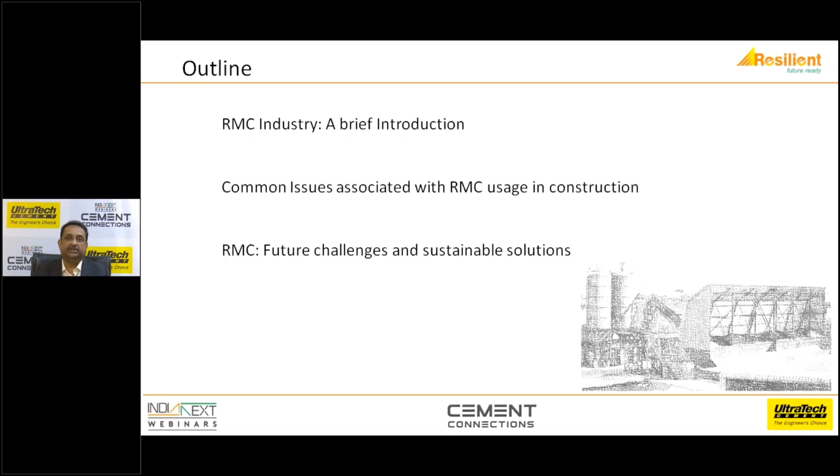The subject today is ready-mix concrete in construction: common issues and solutions. Looking at the outline, I'm going to talk first about a brief introduction to the RMC industry. Then I will get into the main subject today, which is the common issues associated with RMC usage in construction. I will wind up with the future challenges and what we see as sustainable solutions, not just for the ready-mix industry, but for the construction industry at large.

To start with the ready-mix industry, the first commercial ready-mix plant in India started in 1990 in Pune by a Mr. Kelkar. Unfortunately, this enterprise was not a commercial success. It was in 1994 that, for all practical purposes, the ready-mix industry kick-started in Mumbai.

Unitech Prefab and ACC had set up two different units in Mumbai in 1994. Soon after, RMC Group PLC, which at that point in time was the biggest and largest ready-mix producer in the world, entered India and set up their office in Mumbai.

At the same time, Fletcher Challenge from New Zealand, a building materials major, also set up operations in Bangalore. You could understand these were the early days of liberalization, and for multinationals and world majors to see Indian ready-mix concrete as a potential market was a very big, very important step at that point of time.

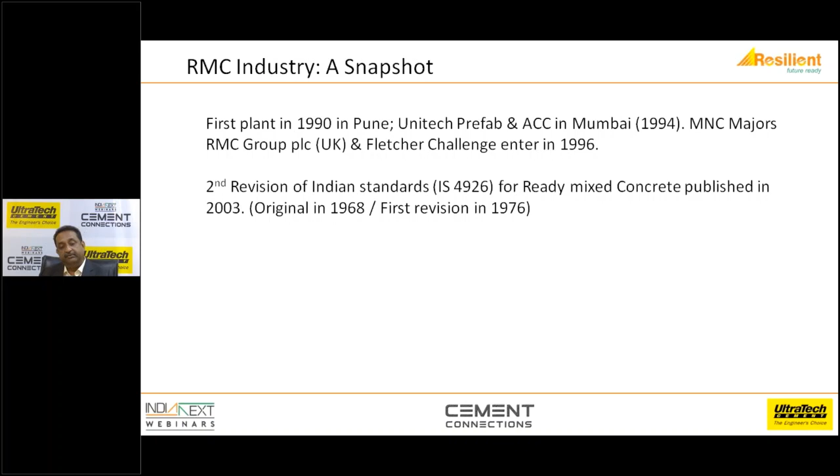Another major milestone was the second revision of the Indian standards for ready-mix concrete in 2003. This was a more comprehensive document covering the ready-mix industry and guidelines for use of ready-mix concrete in India. Many of you may be surprised that this code first came up in 1968, and the first revision came out in 1976, 14 years before even the first plant started in India.

We always believed, and I've been associated with this industry since 1994, heading Unitech Prefab's operations in Mumbai, that the RMC industry will act as a catalyst in modernizing Indian construction. If you look at the construction industry before 1990 or mid-1995, you could hardly find a tower crane at any construction site. But today, the skylines of Mumbai, Bangalore, or Delhi are dotted with a lot of tower cranes.

M45 was the highest, strongest grade of concrete made in those days. But today you have more than 1 million cubic meters of high strength concrete, M60 and even M80 and M95, being used in this country. You have express concrete, colored and textured concrete, self-compacting concrete. So in a way, ready-mix has proved a catalyst to change and modernize the Indian construction industry and has given a lot of support to technological development.

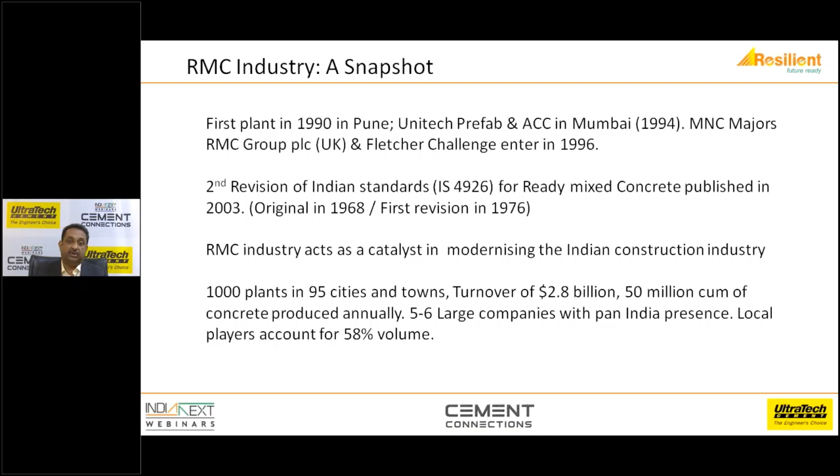By the nature of the business, we also find that large players, 5 to 6 large players with a pan-India presence, operate in this space. But looking at the nature of the product, it's not surprising that this industry is dominated by local players, because you take local raw materials, interact with a local building fraternity, and this product doesn't have a shelf life of more than three hours. So this is a snapshot of the industry and how it has grown.

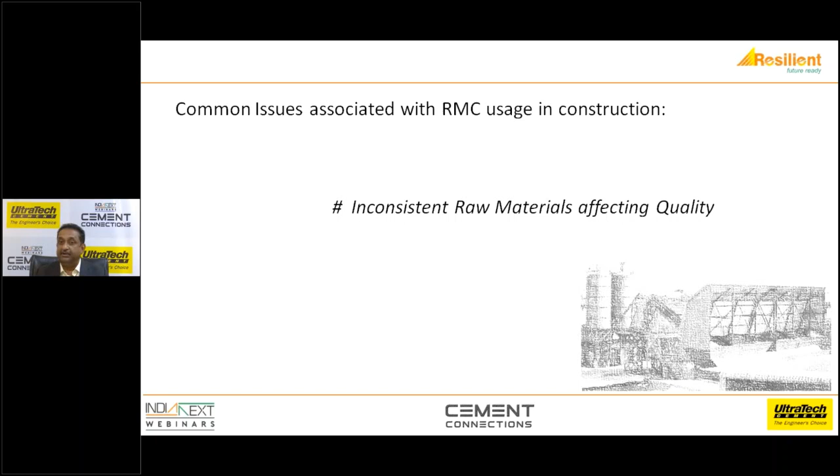I will now go into the major common issues which the customers or users of ready mix often encounter. I've been with this industry for the first 10 years, then moved out, and came back a year back. I found that most of the common issues I faced in those 10 years are the same even now.

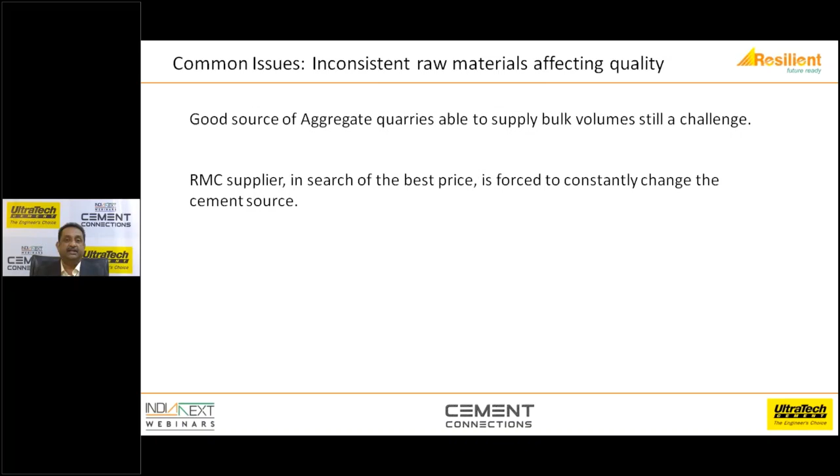Even after the industry has progressed so much, inconsistent raw material has always been an issue. Good quality aggregates with bulk volumes is still a challenge. Although the cement industry has progressed so well and 300 million tons of cement is available in the country today, in search of the best price and commercial deals, the RMC supplier is forced to constantly change the source of cement, which has a major impact on quality.

Fly ash, which is a key supplementary cementitious material, is still a traded commodity with minimal quality standards. While a lot of focus is on cement, aggregates, admixtures and fly ash, what people tend to overlook is potable water quality. Potable water is recommended for making concrete, but the fact of the matter is most of the ready-mix concrete industry

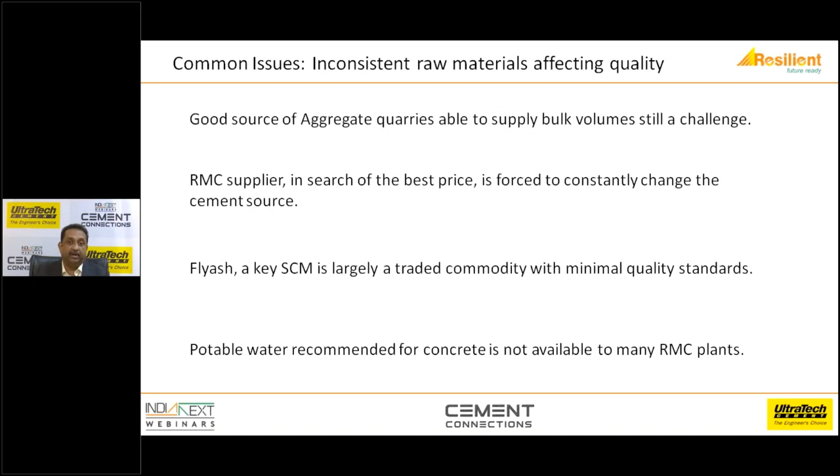don't have access to industrial water supply or municipal water supply, and have to fall back on water suppliers or drilling their own borewell. The quality of the water from the borewell needs to be ascertained, because the chloride limits or the sulfate limits could be beyond the permissible limits in some parts of the country at least. So this is an area where people need to focus.

So how do you deal with these situations? When you look at the source of aggregate, a single source is the ideal situation, but we all know we don't live in an ideal world. So if multiple sources have to be used, make sure that the aggregates are what we call demonstrably similar category. When I say demonstrably similar, we are looking at the key properties of the aggregates, which allow the variability or its impact on the variability of concrete to be even lower.

If you need to have multiple sources, I would advise going for 2 or maximum 3 sources. Ensure it is of the same petrological type, that the dry loose bulk density is within plus minus 75 kg per meter cube tolerance, the apparent particle density is within plus minus 0.04, and the average grading is within plus minus 10% in the mid-band sieves. Also make sure you don't have a high degree of variability in the 75 micron passing in your crushed sand, which is used as fine aggregate.

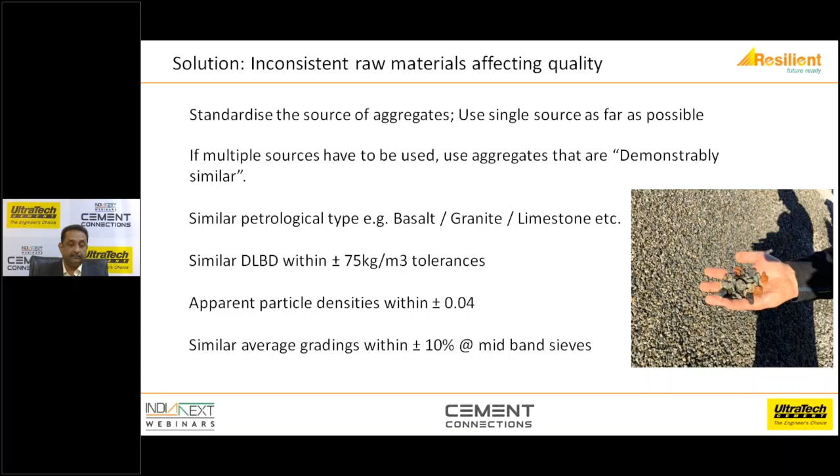If your business demands that you need to go for more than one source of cement, always use only one cement in a silo. Don't mix the cement. And if you need to move in, make sure you shortlist 2 or 3 cements of similar performance - in strength, in workability retention, in setting, and in strength gain - so that even when you have to switch over, you are ready and there are no surprises.

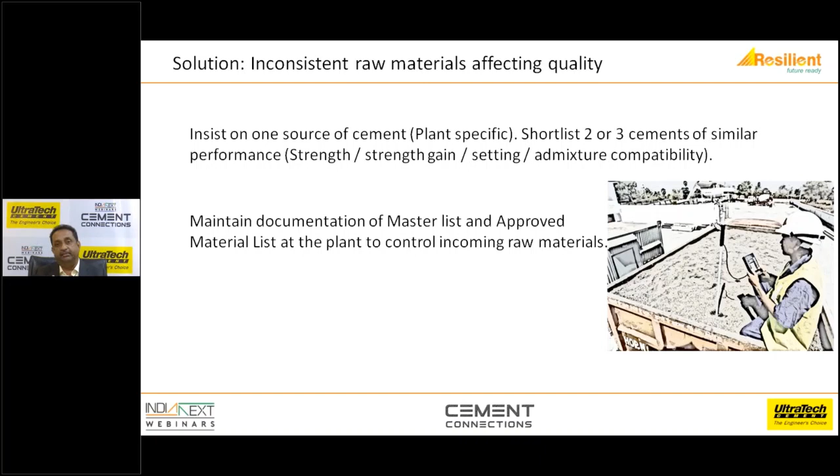From a document control and technical perspective, maintain documentation of the master list. A master list will say that in a particular plant, which are the sources of raw material that have been approved from the technical point of view. There should also be an approved material list at the plant, which is a guideline for the plant officer for inwarding material. At any point of time, the inwarding material should always be part of the approved material list.

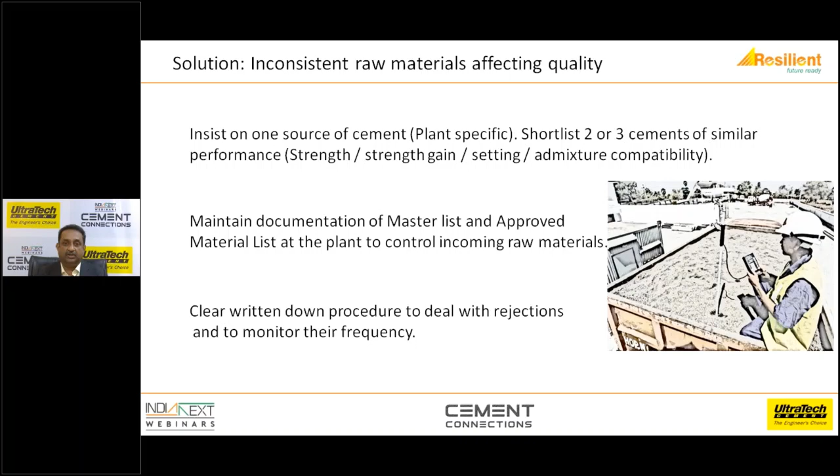When you do the incoming material acceptance, there should be a clear written down procedure to deal with rejections. And monitor the frequency and give feedback to the aggregate supplier so that you can constantly improve the incoming material quality through dialogues, discussions, and communication.

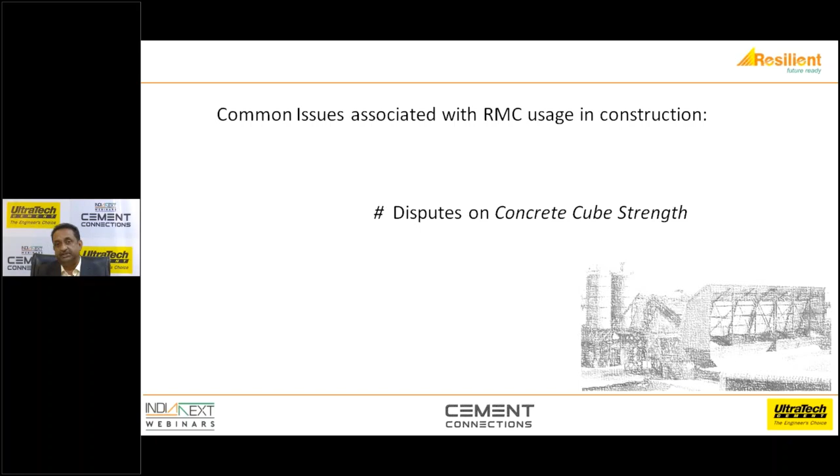The next common issue, which is a big problem, is concrete cube strengths. Quite often, you get disputes between the concrete supplier and the customer, saying there's a big mismatch between the concrete cube results. Before we get into the cube results issue, one of the most important factors to keep in mind is that you are sampling and testing the product right, and the test results reflect the true concrete that has been supplied. The Indian Standards 4926 very clearly tells you the right method of sampling.

You should let go the first 0.3 cubic meters of sample of the concrete which comes out of the truck mixer when you do the sampling, and you should not take the sample from the last 1 cubic meter of the truck mixer. So you have to take 4 increments from anything between the first 0.3 and the last 1 cubic meter of concrete, remix it properly, and then cast the cubes with that.

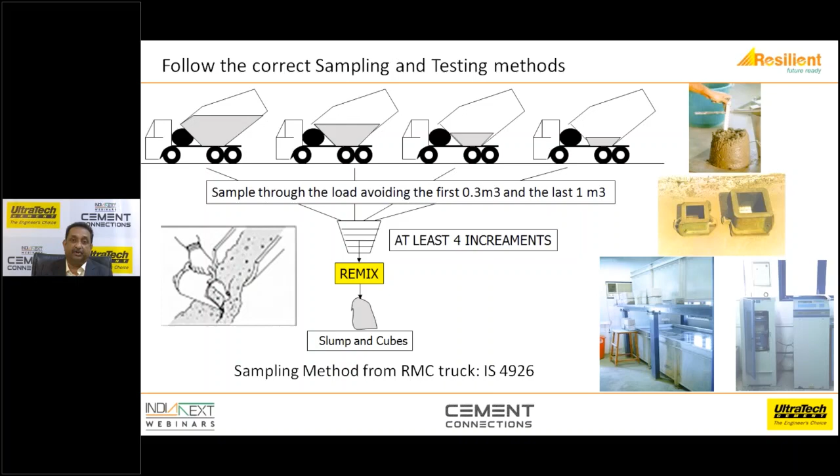It's also important to know the direction in which you do the sampling. What you see on the left in the middle is the right sampling with the scoop, which is perpendicular to the flow of the concrete. Using the right cube molds, using the right curing, using the right testing, the test machines are all important to ensure that you get results which reflect the quality of concrete. Otherwise, this dispute won't be resolved properly - you'll be barking up the wrong tree, because in the first place, the result itself is not proper.

Now, if you don't sample or test right, what are the implications? This is taken from the Manual of Ready-Mix Concrete by JD Dewar and Anderson. A sampling error tells you that you could get a result which is plus or minus 10% of the true average cube results of the batch of concrete. Failure to remix the sample can give you a minus 15% negative result.

There are other issues like your cube mold, lack of mold oil, distorted cube mold. If the cube molds are not perpendicular to each other in the face, you have a problem there. Incomplete compaction of the concrete can also give you issues.

Curing temperature outside the permitted range - your permitted range is 27 plus minus 2 degrees centigrade. If you cure it higher or lower, you will have different kinds of strengths. The lower the temperature, the lower the strength you will get. Higher the temperature, you might end up with increased strength.

One practical issue observed everywhere is a lack of moist curing. Your standard talks about using the concrete - the cubes have to be put in water, cured under moist conditions for 28 days. If you do not cure the concrete in the first 3 or 4 days and it is left outside and then you cure it, it will impact the strength. If you don't continuously keep moist curing, you will have a problem, and that is not reflecting the true quality of the concrete that is supplied.

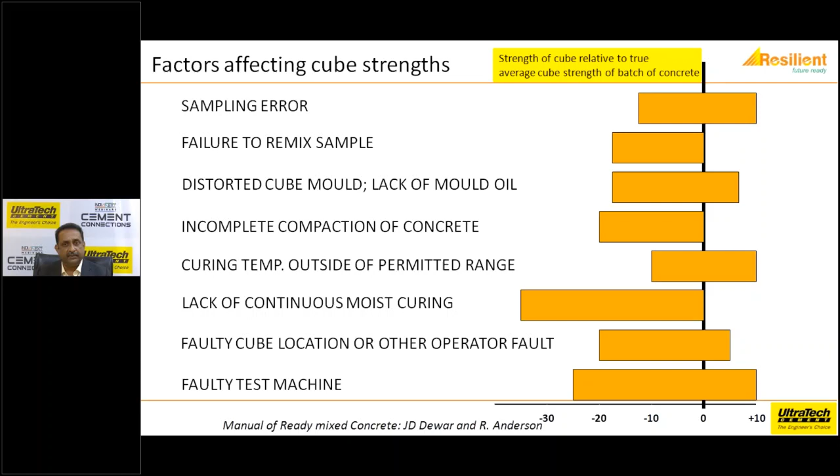Now, having said this, if you still have a problem, how do you actually address that?

Right here, what you see on the screen are some pictures of different non-destructive tests available. On the top right-hand corner, you have the ultrasonic pulse velocity test. On the left bottom, you have the Schmidt hammer or the rebound hammer. You have the concrete pull-out test equipment next to it, and the core test. So these are different non-destructive tests available to the user to find out, if there is a dispute, whether the concrete in question is good or needs further strengthening.

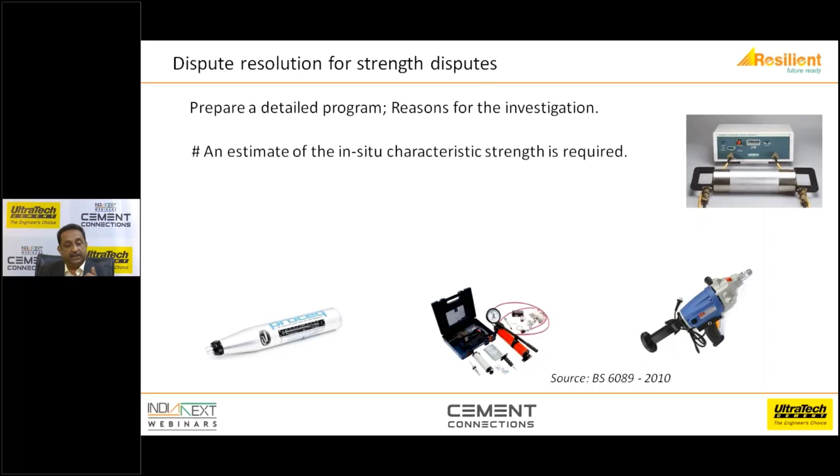But before you go to that, there should be a discussion. A detailed program has got to be chalked out, and the reasons for investigation have got to be clear in the minds of the people concerned. What do you really want to get out of the investigation? Do you need to estimate the in-situ strength of concrete? Or do you feel that the concrete which has been supplied is only problematic in some areas, but the rest of the areas are okay?

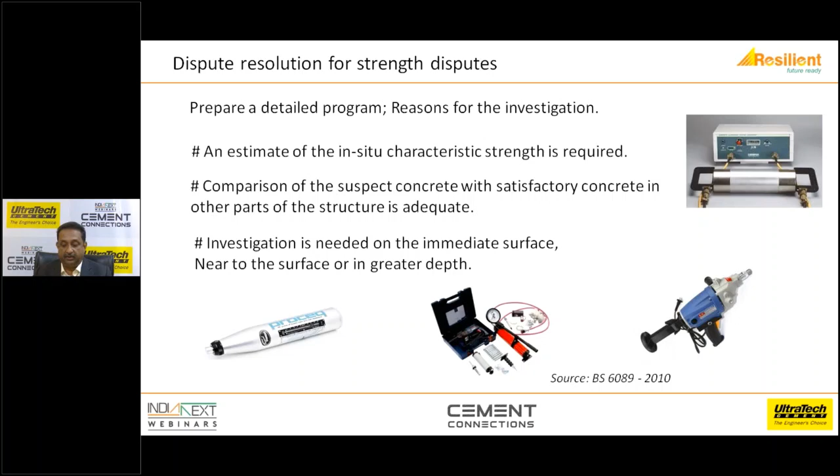So is it a comparison you need? Or do you need the investigation at the surface, near the surface, or do you need the investigation to be made in depth? Depending upon what you define, you can choose your type of non-destructive test. This slide compares the relative merits and limitations of various tests - we have taken 5 different tests. If you need the region tested, depending upon the region and if in-depth testing is required, then core and ultrasonic pulse velocity are the tests you need to go for. A rebound hammer will not help you there.

There are various standards available. The British standard is what I have quoted over here - British Standards EN 12504.

And the more the stars, the better the impact is. So if accuracy of the strength estimate is what you need to find out, then core testing is what you need to look for, not the Schmidt hammer.

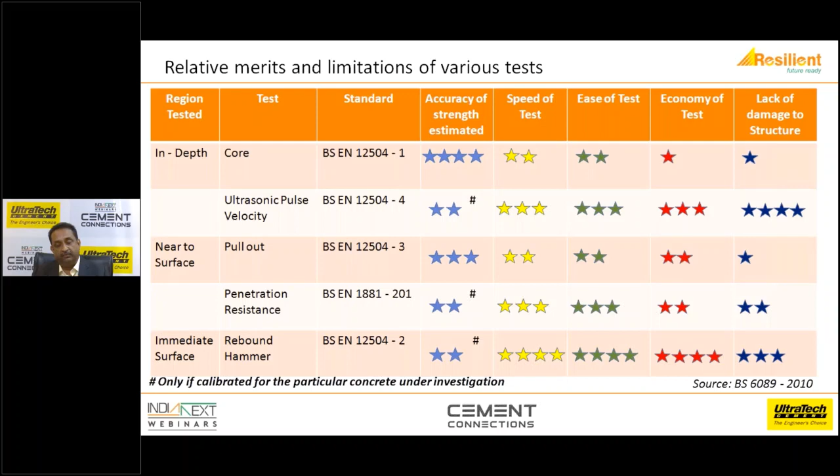But if you are looking for a quick and easy test to estimate whether it needs to be further investigated, then a rebound hammer may work because it gives you a quick test, the economy is better, and it does minimum damage to the structure. I'm not going too much into detail, but depending on the issue you define, look into the various possible options available, and then take your decision.

To avoid the situation, ready-mix concrete plants should exercise good quality control. Quality control in ready-mix is broadly classified into 3 areas. The first one is forward control, the controls you put in place even before you batch the concrete.

This includes monitoring the material, which we talked about earlier - I won't go into it. Material storage: you need to store your cement in proper silos, have the aggregates on a concrete base, and have the partition bins properly in place so you don't have spilling of aggregates. These are the fundamental things you need in your plant to make sure your quality control is in place.

Plant maintenance is another key issue. This involves daily checks which the batcher needs to do before he starts batching. There's a plant maintenance schedule based on what the OEM tells you, conducted at a particular frequency. You also need to look at calibration, as per defined frequency, for the weighing, the cement weigh hopper, the water weigh hopper, the admixtures, and the aggregates. All this needs to be done to make sure your concrete is in ship shape.

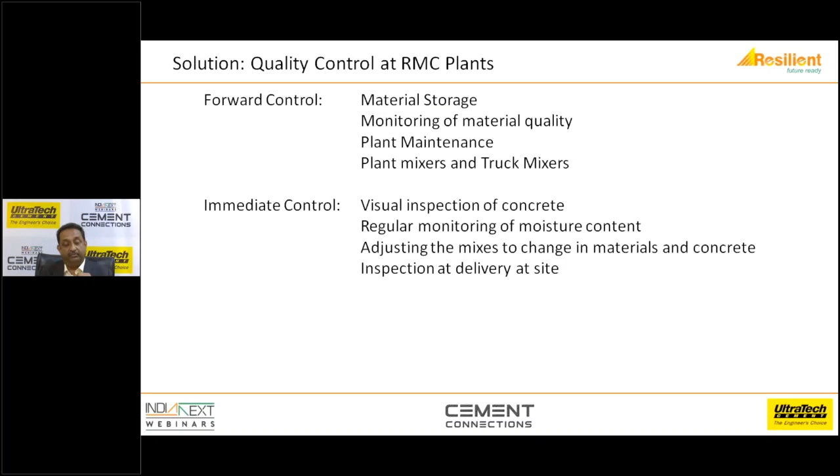The third control is the retrospective control. We talked about sampling of concrete - weighbridge checks I'll come to later. Stock control is another important check, because when you do a stock control of your material every fortnight or at least once a month, you'll be able to detect whether there's any mismatch in the calibration or in the weighing of your materials.

Using statistical quality control analysis and finding the performance of the concrete is a very important tool. Unfortunately, many ready-mix concrete suppliers do not use this as a regular practice.

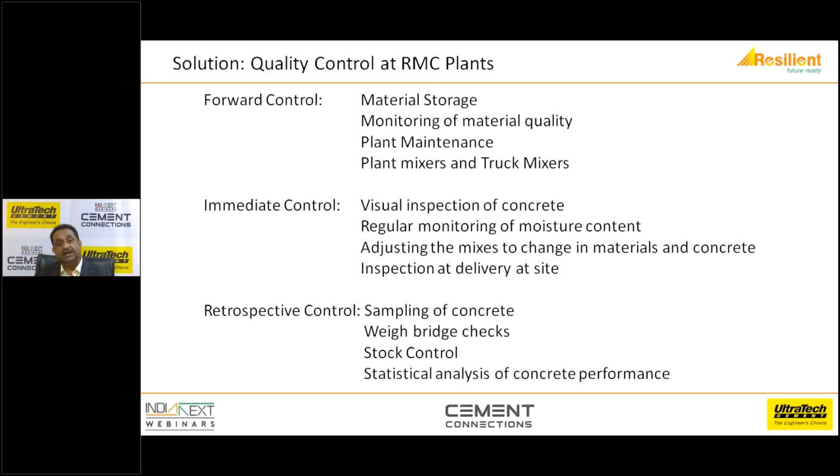I will give you a quick example of how the British ready-mix concrete industry operates. They operate from a cement content to strength relationship, defined through a series of trials based on different cement contents within a particular range. Then, based on the polynomial equation, they'll be able to know the strength for a particular cement content.

For example, at a 400 cement content, you know that this concrete should be giving you 47 newtons. So at every cement content, you know what is the equivalent strength this particular group of materials will give you with that particular cement.

This is used as a baseline for monitoring the performance of concrete at site. So when you get your cube results, the cube result is first compared against the base strength, what it's supposed to give, and the sum of the deviation is monitored. The sum of the deviation, which is the cumulative sum of the deviation, is the CUSUM analysis by which you pick up the trend. Once you pick up the trend, here you have the CUSUM mean, which tells you whether the strength is going down or going up. Based on this, you need to actually adjust your cement content.

Now, this is also using a correlation where you predict from a 7-day to 28-day what is the strength required, and before you actually expose yourself to 28 days of production, you will be able to take quicker decisions. This is actually not only monitoring the quality. My experience with using CUSUM in India is that you save around 30 to 40 kilos of cement per cubic meter because you are able to exactly monitor the performance and put things back into place.

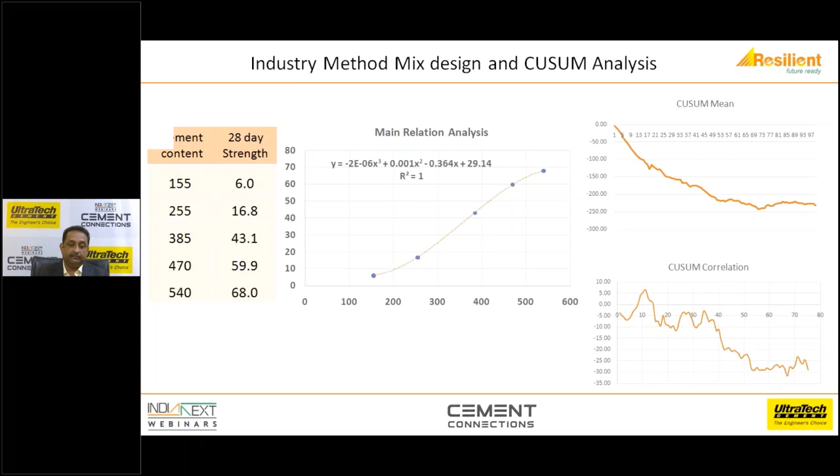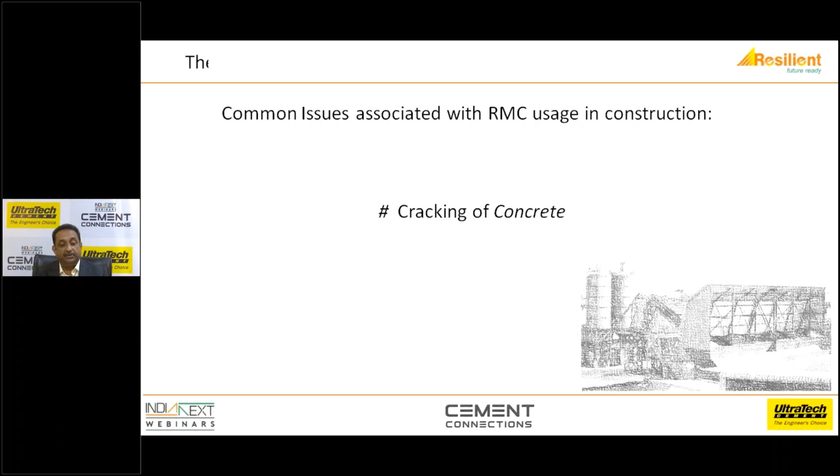The third issue which I would like to talk to you about is the cracking of concrete. Before we go into the cracking of concrete, I would like to tell you that let us look at the construction ecosystem.

If a building in question has got to be built, there is the client who comes with the money. They have got the architects, the specifiers, and the project management consultants who are responsible for the whole quality and the execution of this. Then you have a contractor who actually executes this building. So the ready-mix supplier's role in this whole context is limited to getting the right material, doing the right mix design, transporting it in the right quality, and then pumping it in place.

Therefore, my submission here is that while cracking is an issue, some part could be related to the ready-mix supplier who has a better control on some part of the equation. Mostly it has got to do with the construction practices.

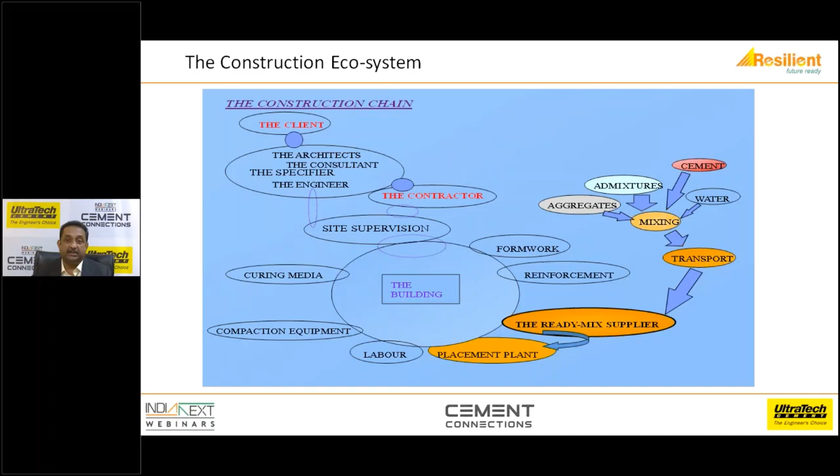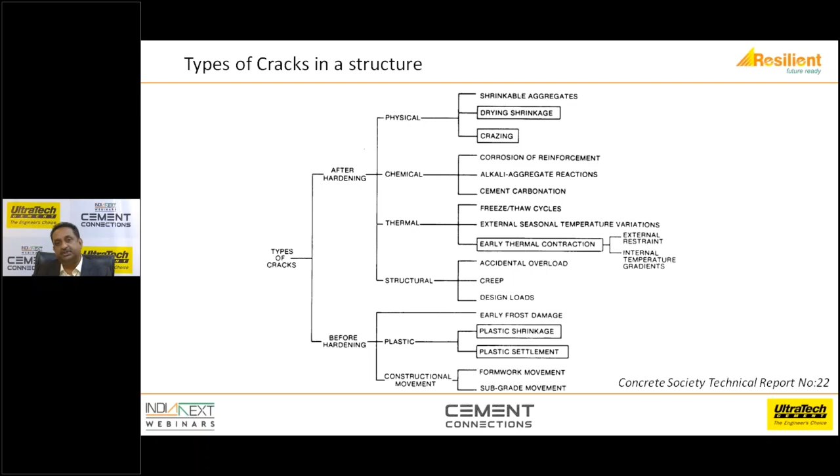One of the most common, there are different types of cracks which can happen - non-structural cracks in the structure. This is a slide which I borrowed from the Concrete Society's technical report number 22 on non-structural cracking. If you look before hardening, there is plastic cracks, plastic shrinkage, and plastic settlement. Thermal cracks induced due to the thermal gradient. Then there's crazing and drying shrinkage, which are the normal cracks which you observe in ready-mix. So for the sake of this particular webinar, I will restrict myself to 3 different types of cracks, which are the most common type of cracks which is observed.

Why does this happen? This happens because of the loss of moisture in the early age of the concrete. When I say early age, when the concrete has started setting, but the concrete is not hard enough to take the load. So when you lose moisture from the surface, capillary tension is created on the surface of the concrete, and the concrete per se is not strong enough to take or withstand those cracks, and then it cracks.

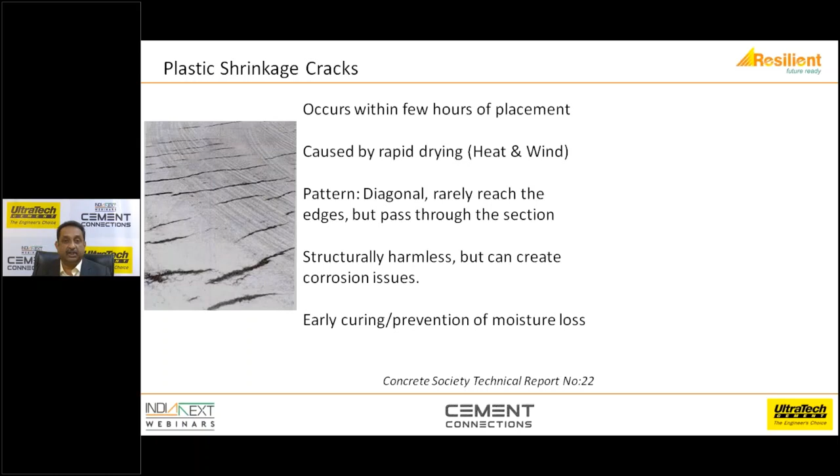So the only way, or the best way, you can prevent this is to start early curing. And when you do early curing, how early is early? You need to make sure that when the concrete starts, the sheen on the concrete is off and it starts looking a little bit dull. That means you started losing moisture from the surface. That is when you need to start sprinkling water, or cover with a plastic cover, so that you prevent the moisture loss. There is a very good graph which is again given in the Concrete Society technical report, which tells you when you need to be careful, or what precautions you need to take.

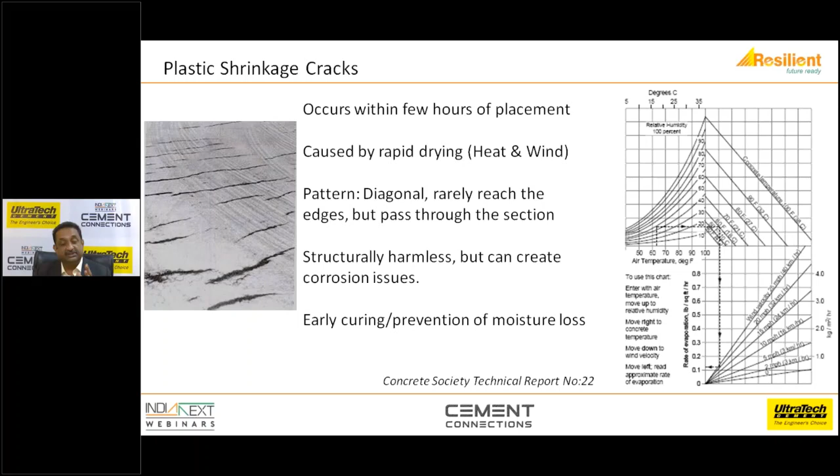It's a combination of air temperature and relative humidity. Lesser the relative humidity, more is your evaporation loss. Suppose you take this in Fahrenheit, you need to convert into centigrade. From this, you find out the placing temperature of concrete. From there you come to the wind speed graph, and when you plot it back to the y-axis, you get the rate of evaporation. If your rate of evaporation is less than 0.5 kg per meter square per hour, you are okay. If it exceeds 0.5 kg per meter square per hour, you need to take precautions. The second one is the plastic settlement cracks.

Now this is different from plastic shrinkage cracks. This happens when the concrete settles immediately after vibration, and the bleed water comes to the surface, and the cement and aggregate settle down. There is a restraint to this settlement. When I say restraint, it could be in the form of reinforcement, or it could be a change of section. Immediately above that, you will find the cracks to develop.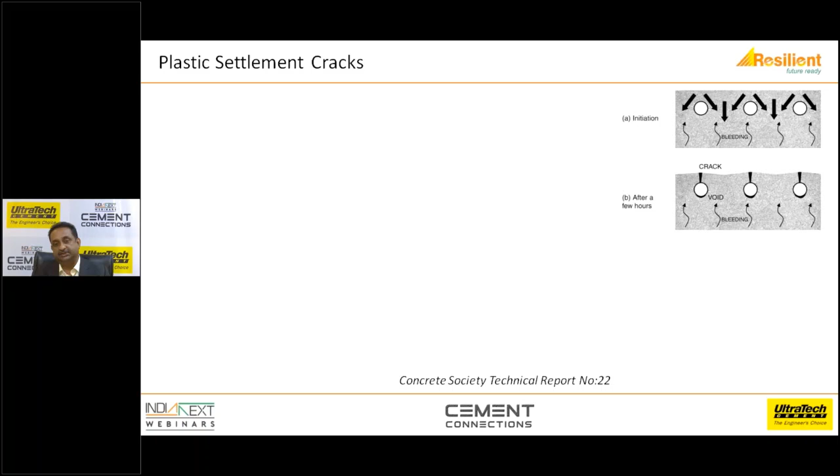This can be easily prevented by, one, a good cohesive mix. Secondly, revibrating the concrete before it is set, because you can disturb the cracking pattern, and then overcome the plastic settlement crack.

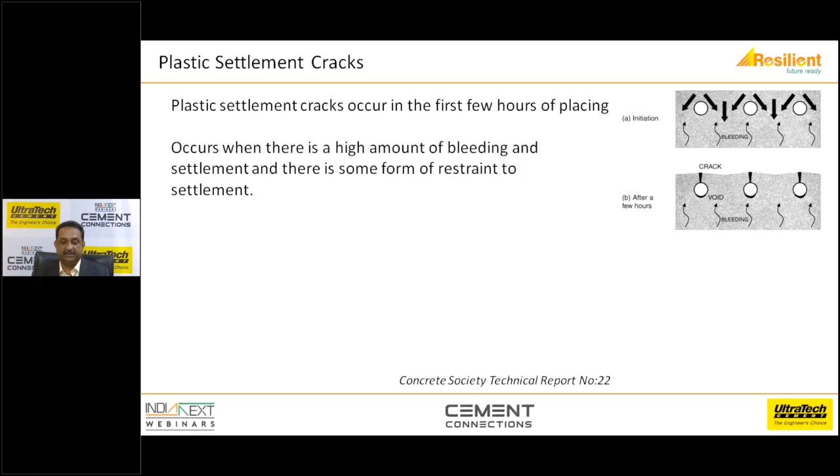Another crack which is normally observed in deep sections or foundations are the thermal cracks or thermal contraction cracks. This is the typical way in which the concrete cracks. This happens in thick sections, where the differential in temperature and the temperature gradient actually is the cause of this problem.

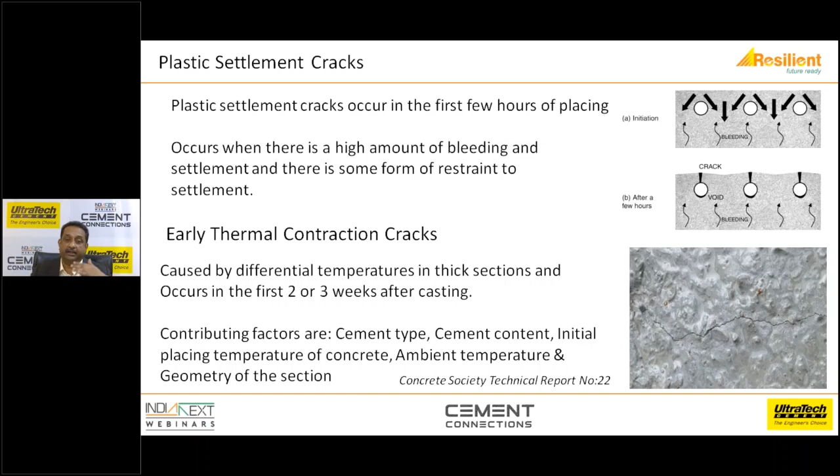If you can imagine a 2-meter thick raft and you're pouring all that together, then after the concrete is over, the temperature at the core is definitely much higher than the temperature on the surface, because the temperature at the surface can dissipate into the atmosphere very quickly, while the core remains hot. If your temperature differential between the core and the surface is more than 25 degrees, depending upon the aggregate properties, then there is a vulnerability for the concrete to crack.

The major contributing factors here are the cement type. If you use only OPC, you have a higher heat of hydration. So if you use 50% or 60% slag, your heat of hydration and thereby the temperature developed at the core can also be reduced.

The cement content - now this may contradict your minimum cement content, so this is a prudence you need to exercise. If you need a minimum cement content, try to make the concrete within that cementitious content. Don't specify very high cement content, because from one end you are creating another problem.

Initial placing temperature of concrete - try to place the concrete, especially in raft, maybe around 25 degrees centigrade, or even better if you can go below 20 degrees centigrade if the thickness and the section is too large. There are ways to overcome this, but again, this is a combination of specifications, the material used, and communication with the specifier, the user, and the ready mix player is extremely important to avoid these kinds of issues.

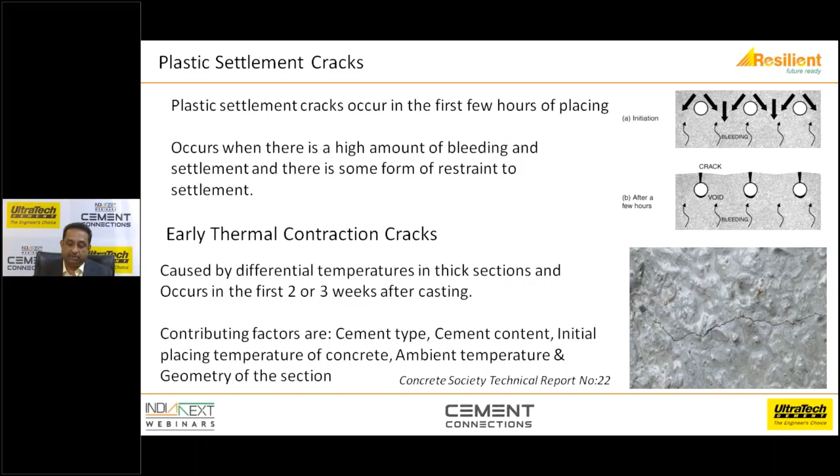So in a nutshell, I would say that cracks are undesirable, but then you need to also understand that this is not just the responsibility of one player in the whole gamut of construction.

I'm being too quick, I understand this, but I have tried to pack in as much information as possible in this 50 minutes, so you have to bear with me for being too quick on this.

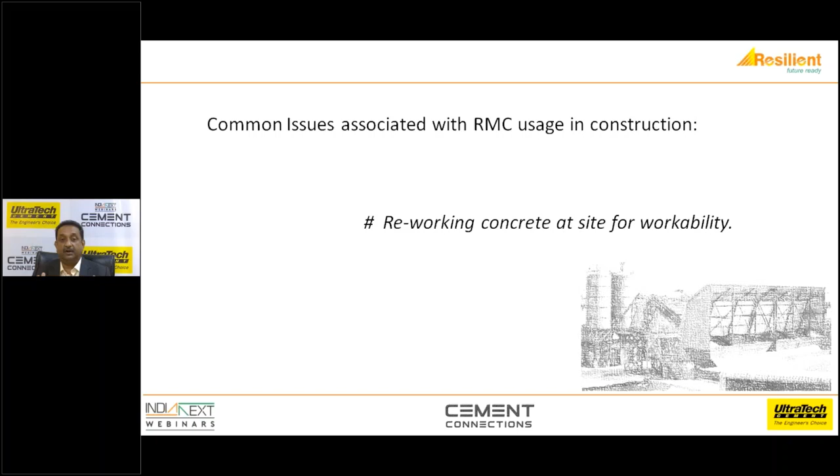Another issue which perennially happens is how do we allow reworking of concrete at site? Now this is the harsh reality, this is there for us to see. The traffic in any city is completely unpredictable.

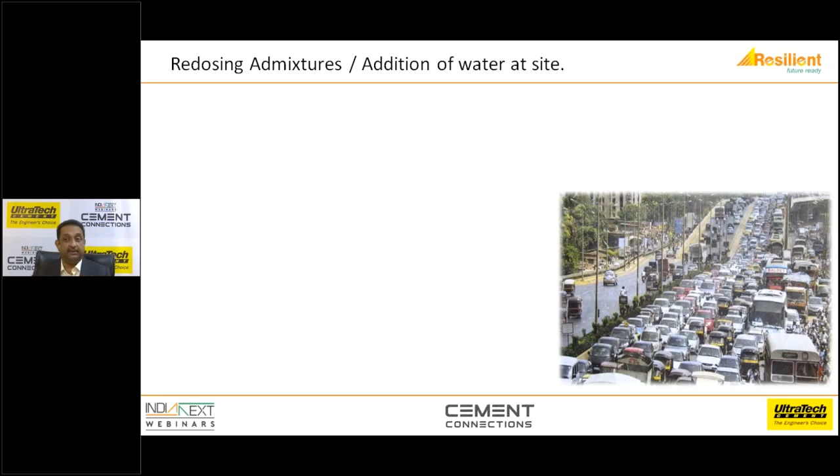Normally, a ready-mix supplier designs for the retention of workability based on how much time it takes to transport the concrete and how much time it takes for placing the concrete, and then they put a margin on top of it. But sometimes there may be unpredictable traffic which delays the arrival of truck mixers. The site may not be prepared, and there's a delay in actually starting the concrete, or even the placing may have hampered.

Another reason could be the change in raw material source. If you change the cement type suddenly, you might land up with too much fines, or C3A content, or C3S content. Anything can actually develop incompatibility with the admixtures. High fines in the sand can also create this. So any change in the raw material source will create problems, and incompatibility of the admixture and cement is a large contributing factor here.

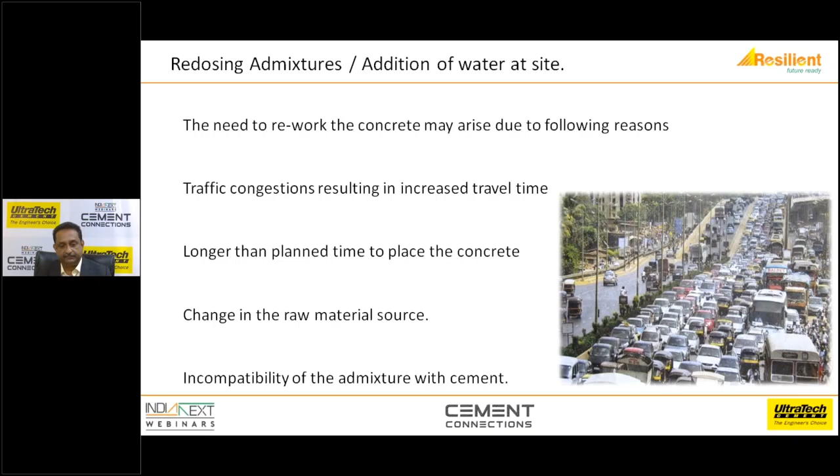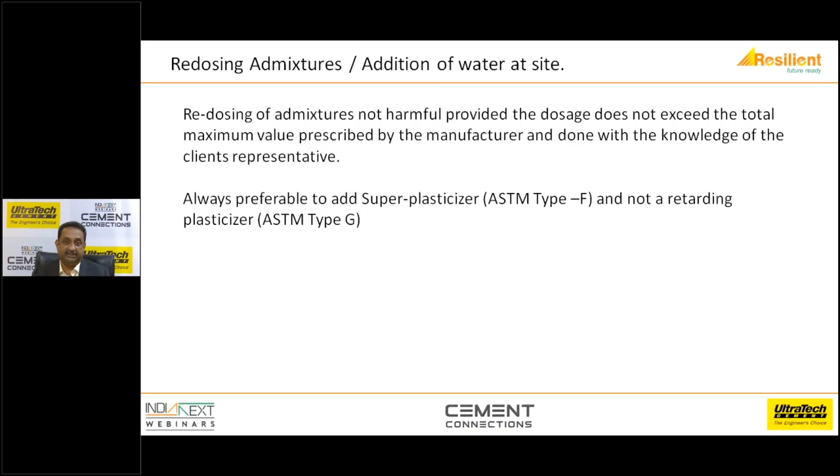What does the code say? Redosing of the admixture is not harmful, provided the admixture you're going to redose is still within the maximum permissible limits prescribed by the admixture supplier. More importantly, the concurrence of the site personnel needs to be taken before you actually redose the admixture. It's always preferable to use a superplasticizer than a retarding plasticizer, which can cause delays in setting.

Another issue is, can we allow water to be added? IS 4926 says that if there is a requirement to increase the specified workability before discharge, water can be added, provided there's a specific request from the RMC supplier and it is signed in by the purchaser. So the crux of the matter here is dialogue, discussion, understanding, trust, and then taking a decision.

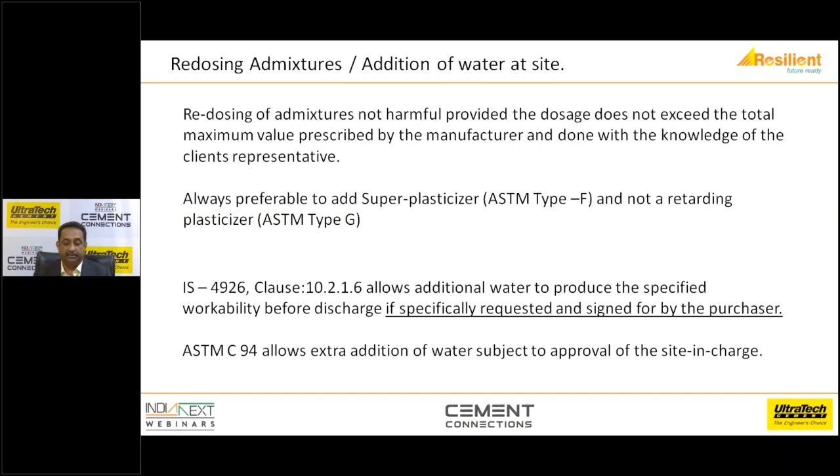You need to take a decision, because you cannot afford to throw away 5 cubic meters of concrete if that can be used. But at the same time, if the concrete is not in a position to be used, it might as well be taken away rather than put into the structure. But if anything can be done to save that concrete, it has to be done, provided your structure is not harmed. This is something which needs to be decided at the site level.

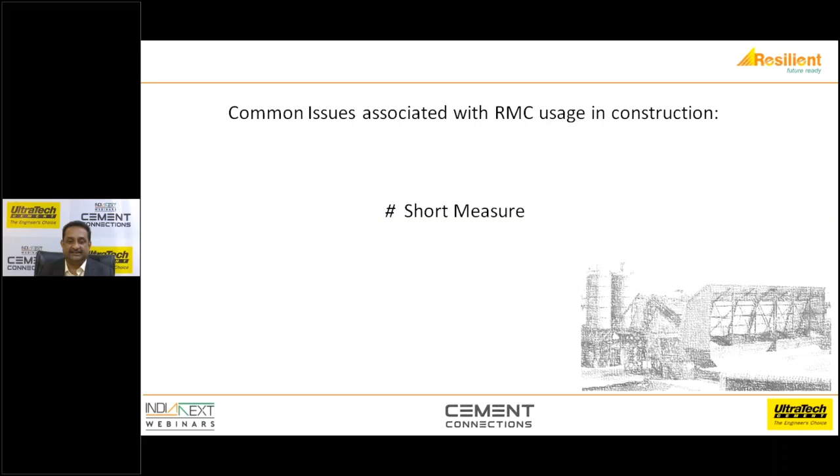Then you have the problem of short measure, which is again one of the very common problems, where you see that we had ordered 45 cubic meters of concrete, but I had to consume 47 cubic meters of concrete. 2 cubic meters of concrete was in excess. Now why does this happen? This can happen due to many reasons.

It can happen at the batching plant because of batching errors. Your computer might show that this much amount of concrete has actually been batched, materials batched in the same proportion as you have designed it, but there could be a slippage. There could be a build-up of material inside the weigh hopper, which is always giving you erroneous readings. These are the issues which can happen.

The change in source of materials -- suddenly you have taken material which is not in the approved material list, and then you have got a higher specific gravity or a lower specific gravity. You have a problem because you normally batch in weights and sell in volume. So specific gravity is a key component in determining your measure.

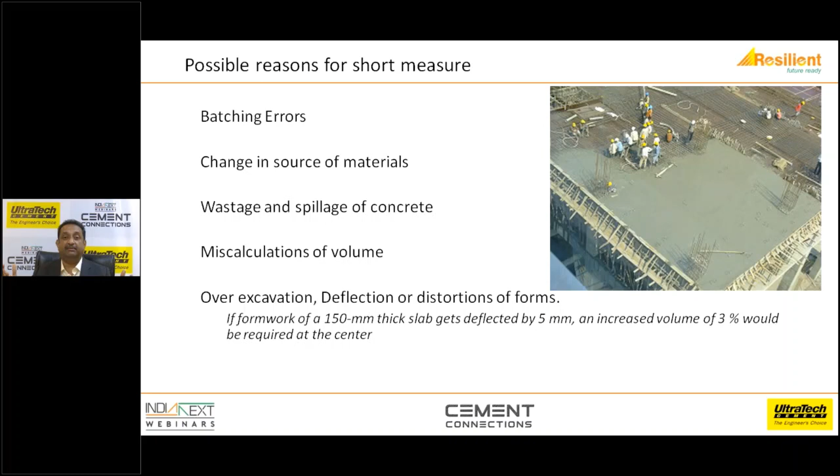It could be wastage or spillage at site, but most commonly what is observed is that it could be a simple case of miscalculation of the volume. Or if you have a foundation which is over-excavated, or if you have a movement or deflection of the formwork, this can also contribute to a higher or lower volume of concrete being consumed. For example, if the formwork of a 150 millimeter thick slab is deflected by 5 millimeters at the center, you'll have a 3% increase in concrete.

The way to check this is that you check for the yield of the concrete. In your design mix, the RMC producer will tell you the total amount of batch weights, and that batch weight should give you 1 cubic meter of concrete as designed. IS 4926 is very clear: the supply and invoicing will be based on cubic meters, on volume only. So there is no way that the specifying body says you should go and measure the structure at site and then certify. It doesn't work like that. There should be trust, and there should be quality inspected into the RMC producer's operations.

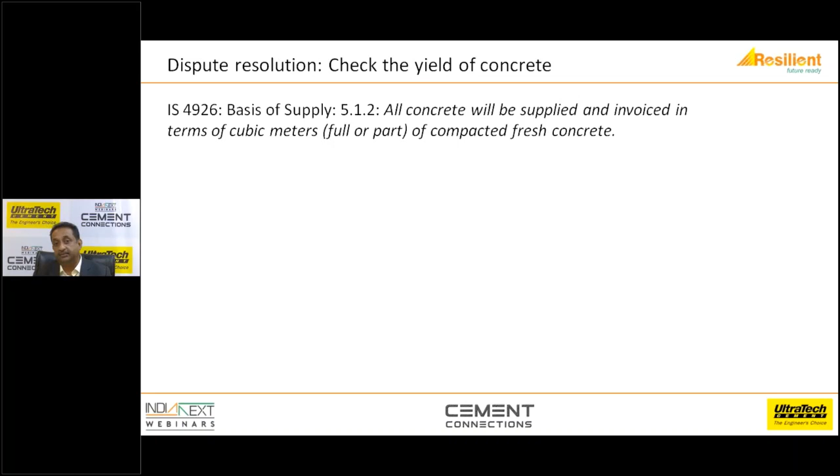Another alternative is to use a weighbridge. You can drive the truck mixer onto the weighbridge, check the weight of the concrete, empty it, and then take the weight again, so you know exactly how much weight has gone, and as per the delivery challan, what's the volume. You can repeat this to ensure you get the right yield. So this is one way of checking the yield and trying to find a resolution to this dispute of short measure.

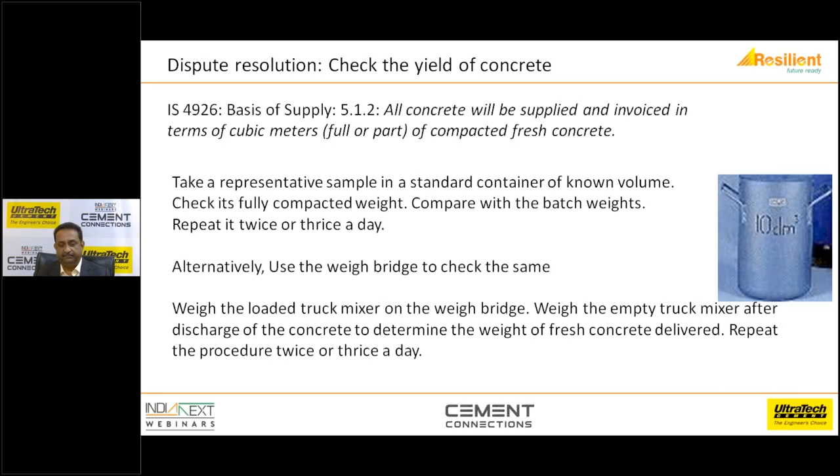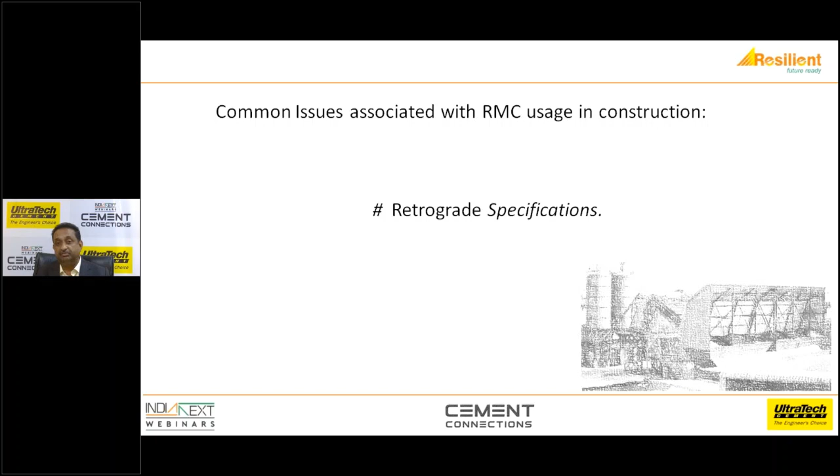Then we will come to what we call retrograde specification. These are regressive specifications which are still in place even after 24 years of ready mix being available. Next year in 2019, if we take 1994 as when commercial ready mix became practically available in this country, we will be celebrating the 25th year of ready mix in India. And still, you will be surprised to see quite a lot of specifications which are retrograde in nature. Let's examine some of these.

You walk into any ready-mix plant, especially in the metros. It's not in tier 1 or tier 2 cities, it's in the metros the major problem happens. There is a high ratio of prescribed mixes relative to performance-based specification. When the whole world is moving towards performance-based specification, here we have the specifiers writing down the prescription in which you have to batch the concrete.

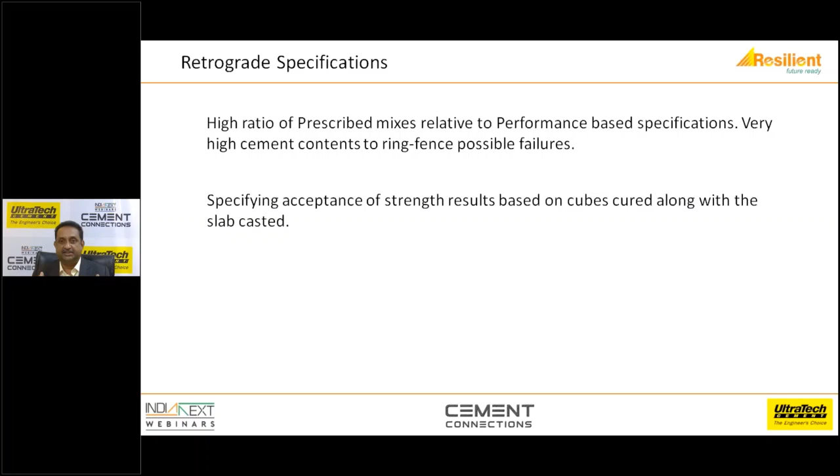If I can draw a parallel, I can tell you, if a particular car manufacturer tells you 25 kilometers per liter, then it is under standard conditions. There is a standard on which universally things are accepted. I cannot ask that I will drive this in Mumbai traffic in the first gear and expect you to give 25 kilometers per liter.

So let's be sensible enough. Let's understand and let's work together, because only that will help us to move forward.

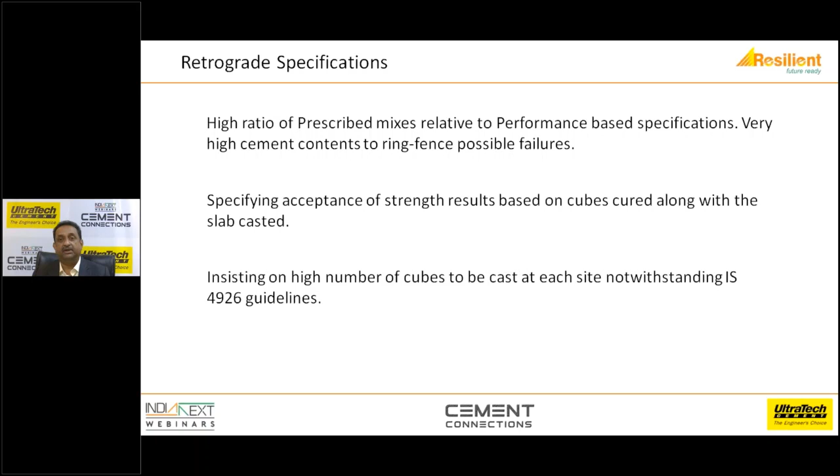Insisting on a high number of cubes in ready-mix, why do you do cubes? You're sampling the production, trying to find out the variation in production. When you do mass concrete, IS 4926 is very clear, you are trying to find production variability. So for 50 cubic meters, you need one set of cubes. If you need another set, fine, but asking for every truck to be sampled is asking too much and won't be of any help. World over, nobody does this kind of sampling, and this needs to be understood, because that resource could be deployed elsewhere to serve the customer better.

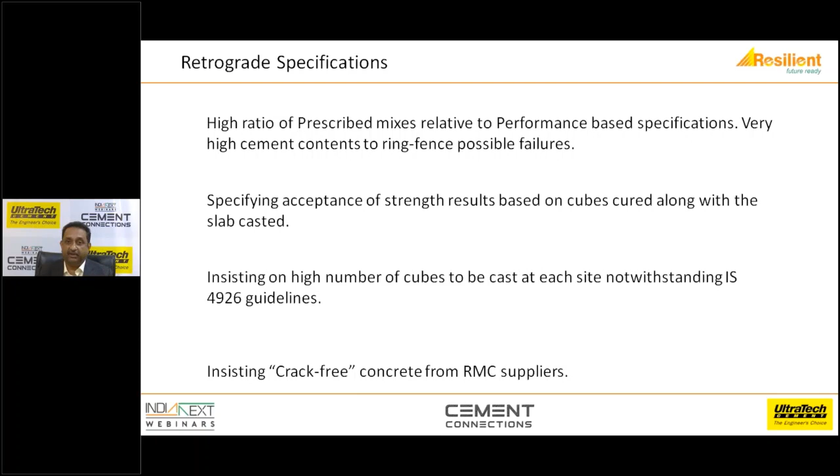We talked about cracks, and we know cracks are not a problem associated with only one section of the construction chain. So please don't insist on crack-free supplies of ready-mix concrete, because it is a problem that needs to be addressed jointly and collectively. The concrete will crack whether you blame it on the ready-mix player or not—it will crack if you don't take precautions at the site.

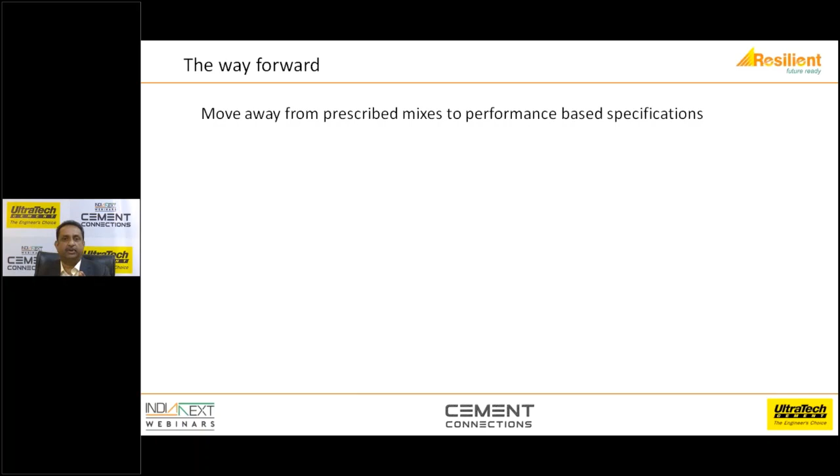So, way forward, we need to be more progressive. We need to move away from prescribed mixes and move to performance-based specifications. Make the RMC producer accountable for the quality he gives, and that should be done using quality systems.

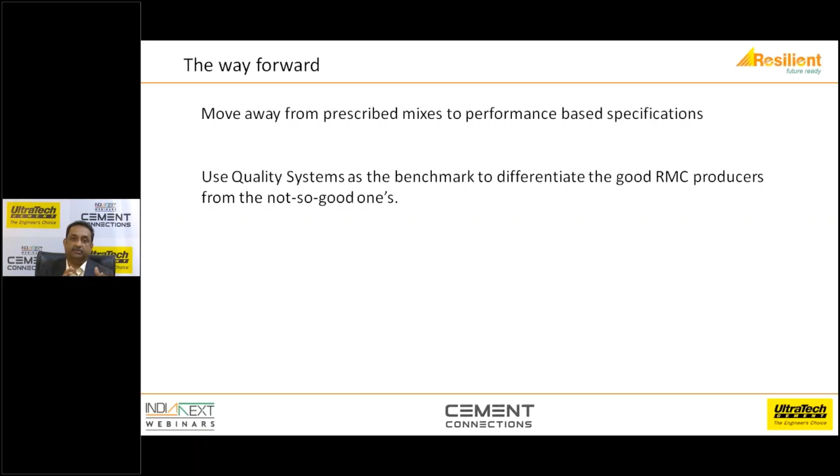Use that as a benchmark to differentiate the good ready-mix producer from the not-so-good ones, and put pressure on the not-so-good ones to uplift themselves. Do not only go by price as the differentiator, because if you do that, you are not helping good producers and good construction and concreting practices to come forward.

There are ready-mix players in this market who have 25 years of experience. Pick their brain, get the best out of it, use their expertise and core competence, and work with them to drive excellence. He will be able to provide a lot of solutions, provided you give him that respect and the kind of freedom to operate.

And the QCI certification scheme is a very good step in benchmarking ready-mix players. But two areas where we need to broaden the scope of QCI are order processing and retrospective quality control. QCI heavily depends on the materials, the production, and the testing.

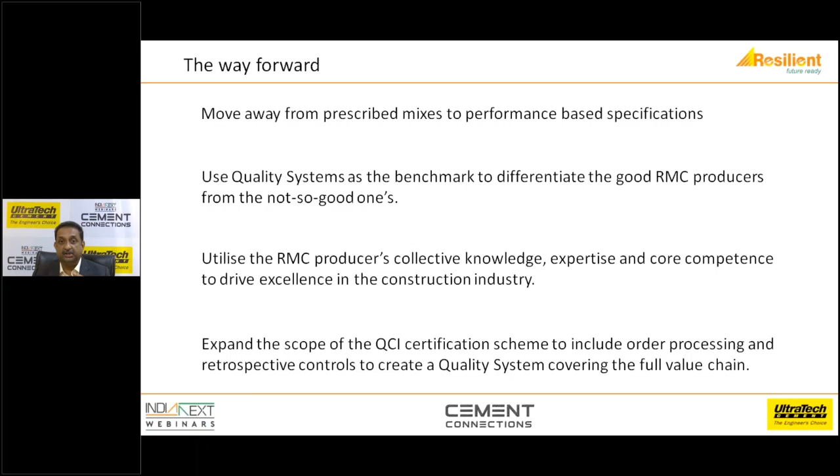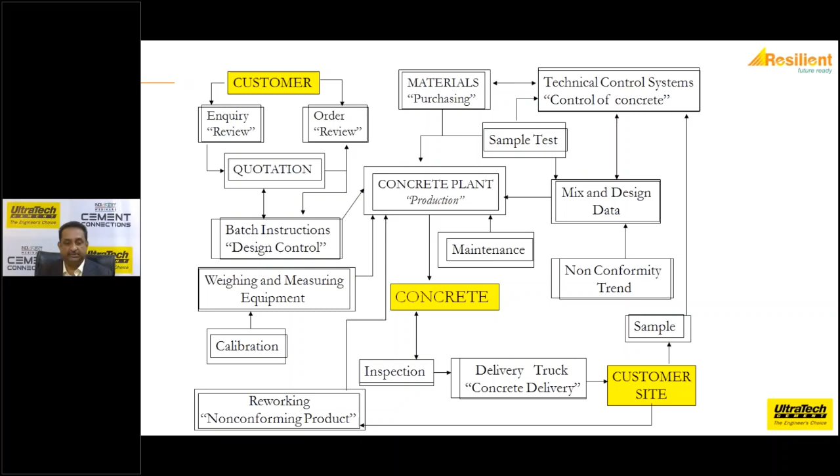Finally, I would come down to the future challenges and sustainable solutions. I would focus more here on the management of waste in the concrete.

If you look at any ready mix plant, on average 2 to 3% of concrete production is returned, rejected, dumped, or diverted. This is the thumb rule. If you imagine 5,000 cubic meters in a day, you can expect around 100 cubic meters of concrete in this category, coming back due to a pump failure, redosing of admixtures, or whatever the problem is. The fact is many plants don't have the capability to handle this issue. Just because you don't have the capability doesn't mean the issue disappears.

So this concrete is going somewhere. It might be dumped at the lowest point, by the roadside, or in some areas, and this is an environmental problem. This is a problem of the whole industry, so we need a proper way to address it.

Another issue is the wash water, which is discharged into the ground without any treatment in many plants. It is so alkaline that it will actually increase the pH of your soil and stop vegetation growth.

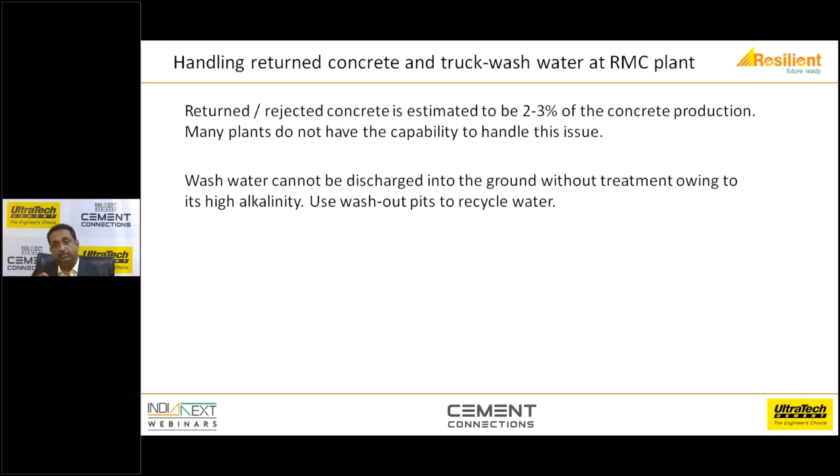The proper way to manage this is by using wash pits. There are different methods, but if you recycle this water, international standards—whether ASTM, European, or British—permit recycled water to be used back in concrete, provided you can establish that the concrete made with the mixed water is at least 90% as good as the concrete you normally batch. There are also limits to alkalinity, sulfates, and TDS, which ensure you can use this as 40%, 30%, or 50% of the mixing water, recirculating it back. So you avoid wastage, and you conserve water, which is a very precious resource.

Then what happens to the concrete that comes out in large chunks and is dumped somewhere? In most places you find rivers, riverbeds, or lakes full of concrete. You need to collectively find a common place to dump the concrete. After it sets, you can crush it and use it as recycled aggregate. You can even use chemicals that stabilize the concrete overnight with an activator and use the concrete again, or use admixtures that segregate the slurry and the aggregates. We need to work out how to deal with the situation rather than close our eyes.

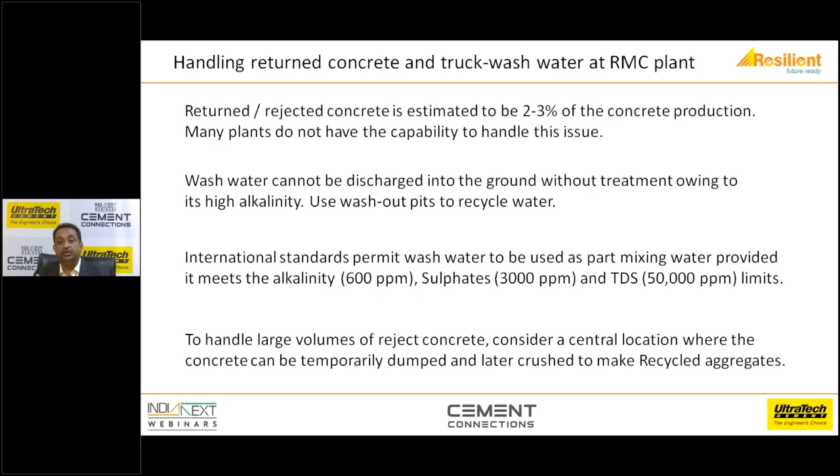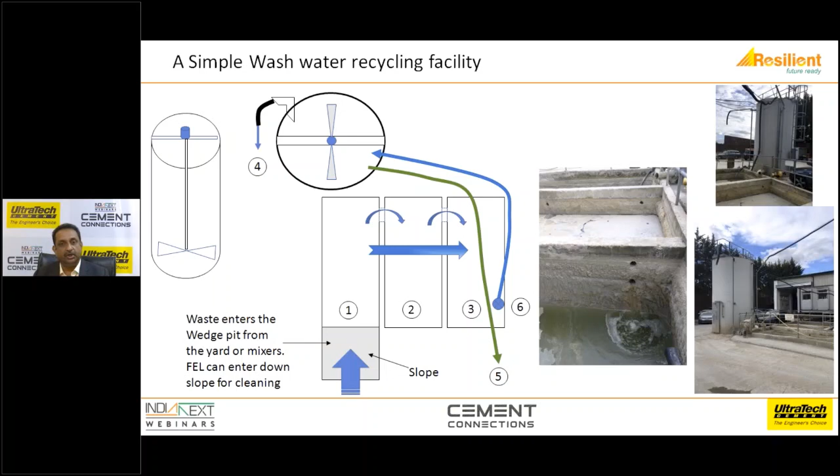From here, you pump it into a holding hopper, which is always kept in turbulence using an agitation mechanism. This washed water is fed back either into the mixing water or used for cleaning your trucks. There are other, more sophisticated methods as well.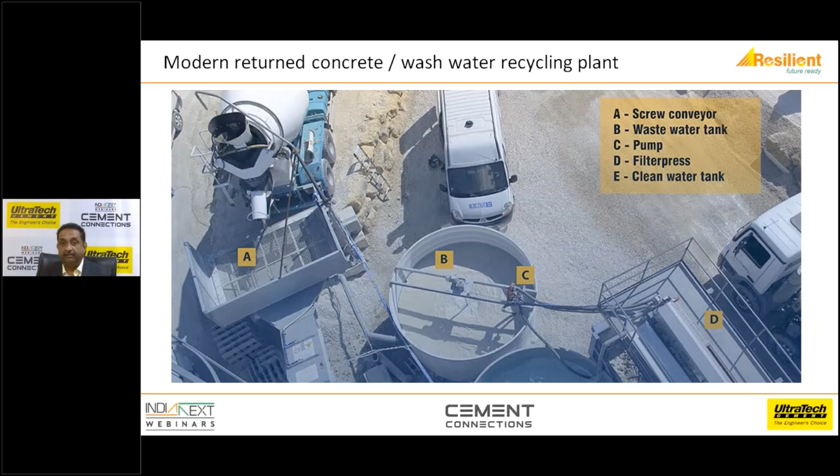You can use an aggregate recycling unit where the aggregates are separated, and the slurry water is put into another tank. You can pump it into a filter press where the sludge is separated and clean water is taken out. Depending on what you need, we need to address this issue one way or another, because going forward environmental laws will become very strict. You'll need to operate within the city, and there will be a lot of pressure on the ready mix industry to adapt to these things.

Finally, I'll leave some food for thought. Think of this: the construction industry is the largest consumer of resources. It contributes 25 to 40% of carbon emissions worldwide. China used more cement in the last 3 years than the US used in the last century. Sand and gravel is the most extracted group of materials. So if China is one example, you have India and other developing countries too.

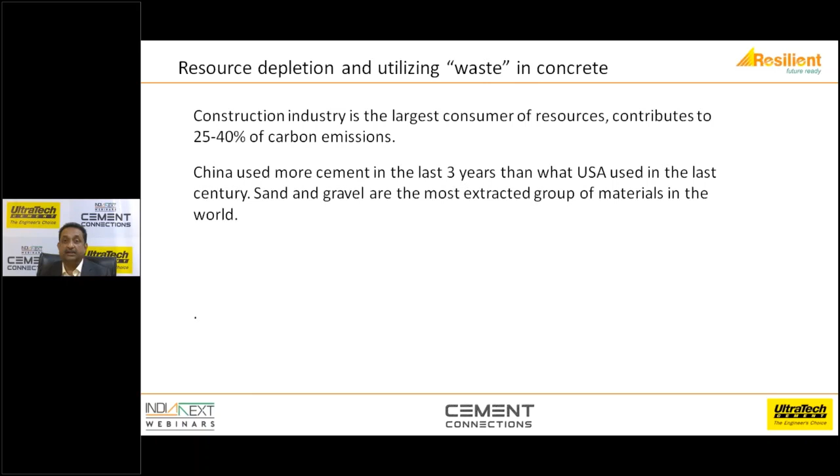So the resources are depleting on one end. 40 billion tons of aggregates are consumed every year globally. At the same time, there are 4 billion tons of construction and demolition waste generated every year, which is hardly reused in countries like India.

Even in Europe, you have hardly 30% of construction demolition waste that is being utilized back. So it doesn't take an Einstein to figure out that the RMC industry will be challenged to reduce resources and use more industrial waste into concrete. Whether it is steel slag, copper slag, or construction demolition waste, adapting and embracing this change will define the future of the concrete industry worldwide.

At this note, I will stop, and I will take questions from you, whichever they may be, and I'll be happy to take those questions.

Do you know the name of the person who asked this question? Can you read this out? For mix design, why do we take initially a grade of concrete?

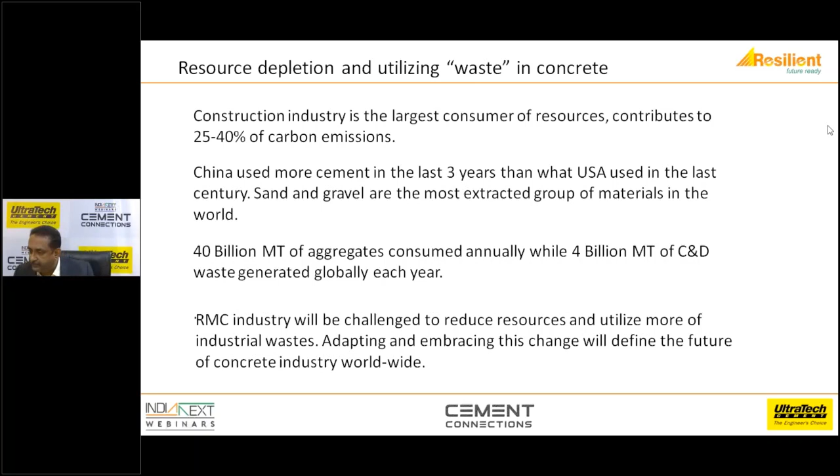This is the question from Neeladri Kaur, and the question is, if I understood it correctly, for mix design, why we take initially a grade of concrete, example M20 and 25.

The grade of concrete is specified by the user. So if I want to place an order, I say this particular grade of concrete is what I need. Then, based upon the ready mix concrete supplier's ability to produce, he has to give a margin on top of it. So if it's an M25 and he has a standard deviation of say 5, then taking into account the acceptability failure rate of the statistical value of 1.65, he needs to go for a higher grade to add that margin onto the 25 or 20 Newton of the characteristic strength.

And that is how you actually design the concrete. So at the lab, if you need an M25, the lab results should give you something like 8 to 10 Newton more than that. So maybe 25 should give you 35 or 32 depending upon your control. But this is to take into account any possible variations in production. So the target strength is not what you need to achieve in the field. In the field, IS regulations say acceptance is based on a non-overlapping mean of 4, where the average should be FCK, or the characteristic strength, plus 3. So these are two different things, if I've understood the question right.